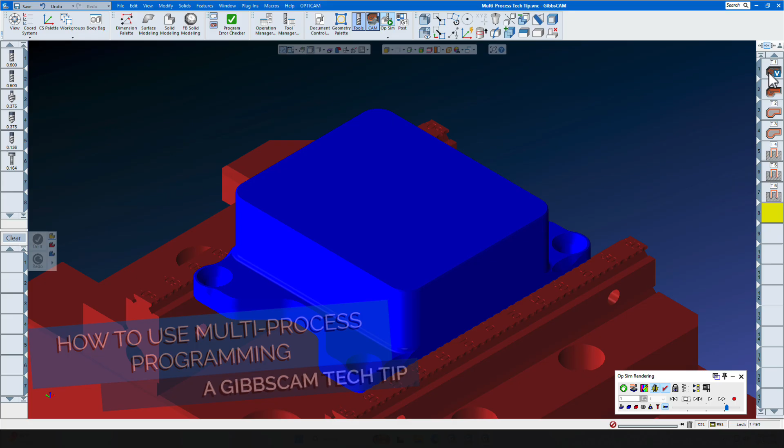In this GibbsCAM Tech Tip, we will show you how to use multi-process programming to instantly apply multiple processes to shared part geometry. It can be a time saver by only having to select the part geometry once for multiple processes. Save the processes to your library for quick recall to other part files with only minimal changes required. Let's show you how this works step by step.

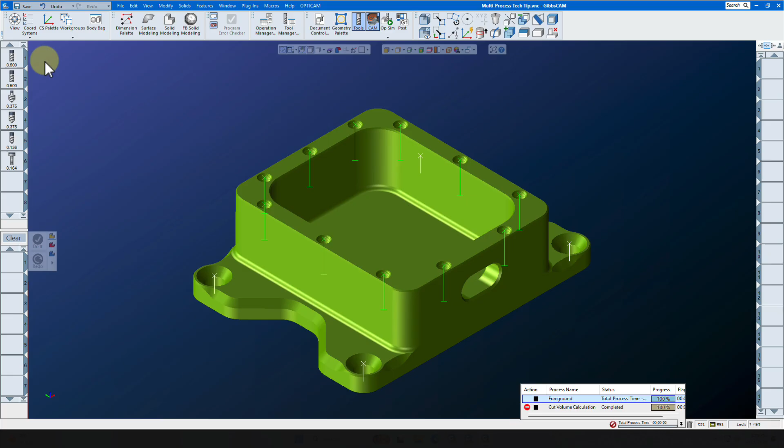We will start with an empty operation list and an empty process list, but we will stick with the tools since that's a very simple matter. Let's have a look at the tools we're going to be using: a 1/2 inch rougher, a 1/2 inch finisher, a chamfer mill for deburring. Next, we will use a spot drill, a number 29 drill, and an 832 spiral flute tap for these blind holes.

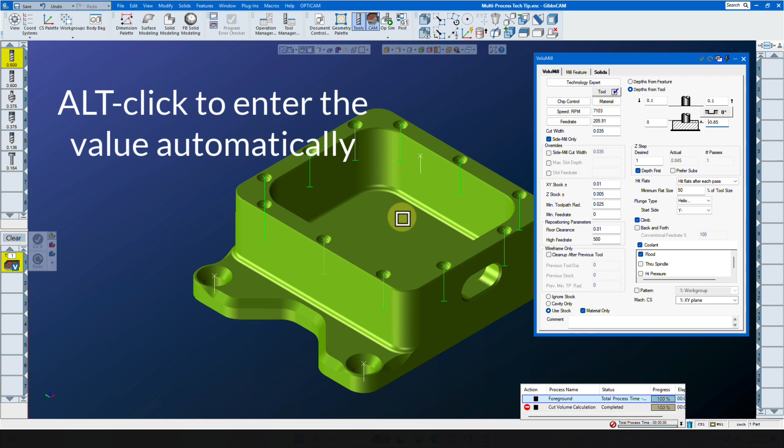Let's start by developing a VoluMill process for the pocket. Clicking on VoluMill, let's check our parameters, and the bottom of our pocket needs to be called out here at -850. Notice that is a double click, alt click on the bottom of the pocket. We're going to leave 10 thousandths of XY stock, 5 thousandths of Z stock.

Next, let's bring the semi-finish cutter down and finish only the floors with a roughing process set to offset with cleanup. Same depth. Pocket stock will be 10 thousandths. Floor stock or Z stock will be 0.

Next, a 1/2 inch cutter with a contour to finish the inner wall. We have our RPM and our feed rate. Our depth is set, our lead in, lead out. Our stock will be 0. Cutter compensation is on. Lastly, for this operation set, we will select the chamfer mill and a contour.

We will set the contour depth to -0.1 and the chamfer width to -0.025. That's the width of the chamfer here on the top of the part. All 4 processes are now ready.

We only need to supply some geometry. We'll use the profiler, select the geometry, and click Do It. Notice that we have the process manager open down here in the corner because it takes a few extra seconds to process all of these at one time.

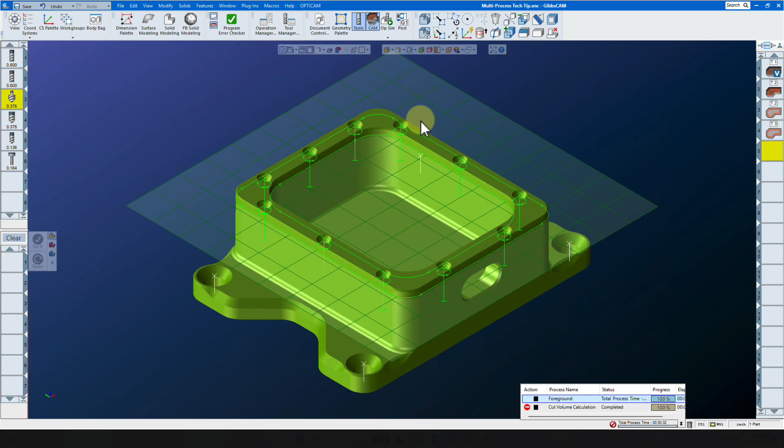We've used the hole manager to single out the holes. Let's start with the spot drill and go directly to a holes process. Our feed and speed set for this material, 4140, is there in the database.

We will be using the hole manager for automated drilling. Our R level, our top of hole, this will be a chamfer, and yes, we want to adjust for the tool tip. The next process that we will build is the number 29 drill, still with a holes process.

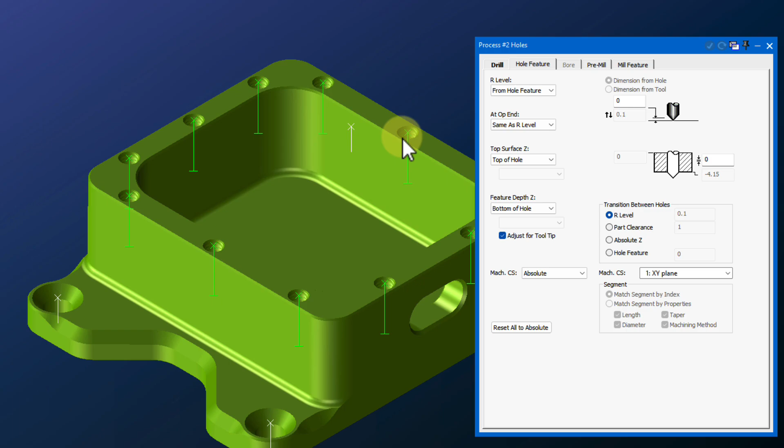Then peck chip break. Our hole feature needs one change: we will change this to bottom of hole for feature depth Z. When you select this, it automatically senses where the bottom of the hole is. Even if all of these holes were at different levels, this one operation will drill them all at their corresponding depths.

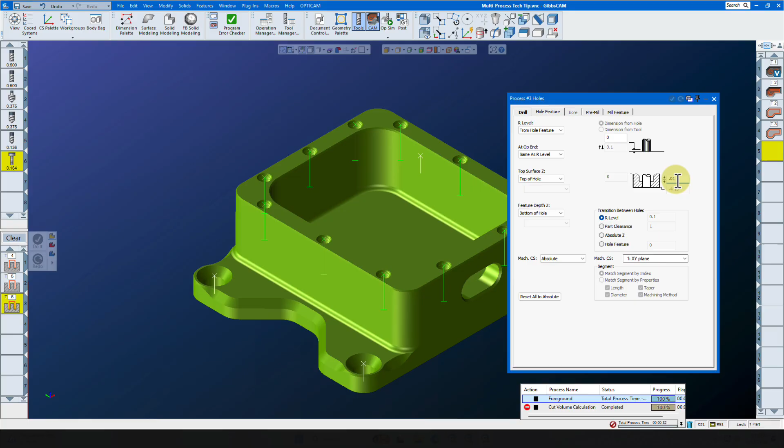Lastly, we have an 832 tap, which we will set to rigid tap and an RPM of 400. Our hole manager will make one change there: bottom of hole plus 100. So we want to stay 100 off the bottom of the hole.

There are 9 holes in this part. If there were 90 or 900, there would be no additional clicks. We simply click one hole feature, right click, select the whole group, and click Do It.

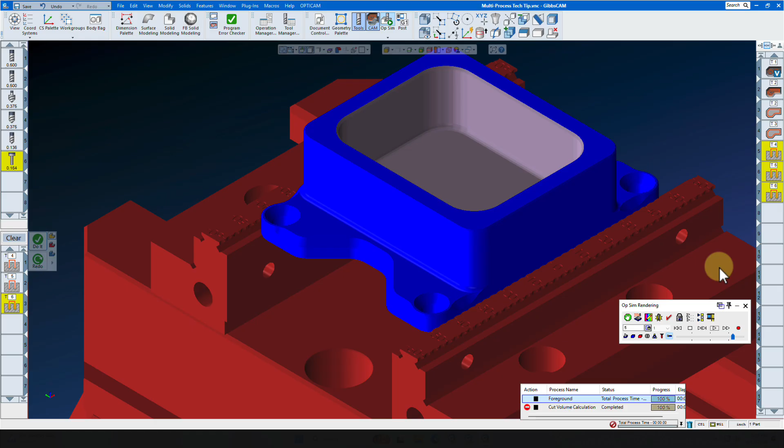We now again have all of the operations done, and if we watch them run in the OpSim, again you will see that they are all linked together, and when you double click one set, that entire set gets reloaded onto the process list, where you can make modifications and click redo even while the simulation is running.

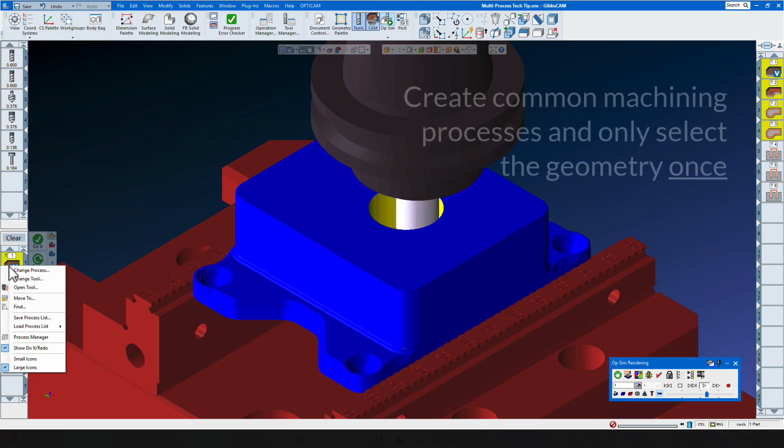Let's review some fine points of multi-process programming in GibbsCAM. Multi-process programming allows you to define multiple tiles in the process list and apply them to the same geometry. You can create commonly used processes and only select the machining geometry once. These combined processes may be saved, recalled quickly, and applied to a new feature on the same part or in another GibbsCAM session altogether. Multi-process tiles are as easy to set up as single process tiles and require no extra steps.

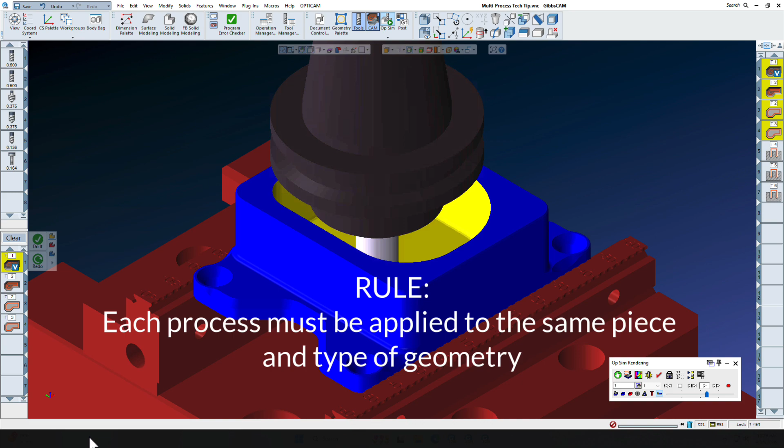Rule 1 is that each process must be applied to the same piece and type of geometry. Example: drilling and pocket roughing may not be created together. Multiple features may be programmed at the same time as long as they are applied to the same piece and type of geometry.

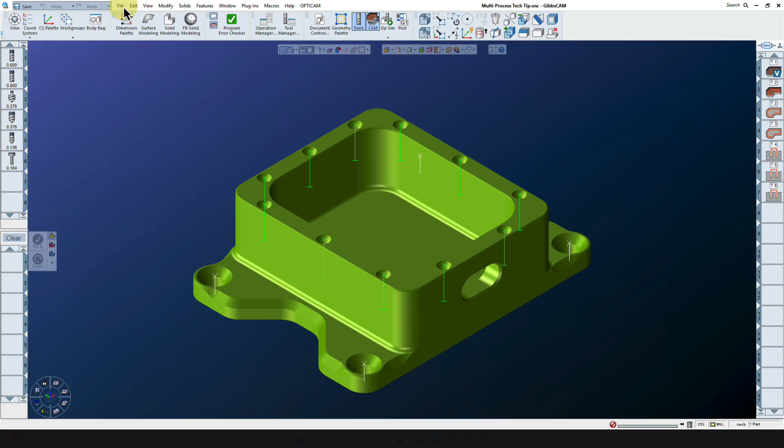Now that this multi-process part is complete, let's move on to a totally different part file with 2 different pocket features in it. The depth of the pocket is a little bit different, so we will update those when we bring in the processes. Notice that the tool list is empty, the process list is empty, and the operation list is empty. We saved those earlier, and now we can simply reload them with a click.

Update the pocket floors with a double click and an alt click on the pocket floor. Same for this one, for the floor finish, and the same for the contour wall finish. The deburr pass does not need to be updated because its depths and widths are correct.

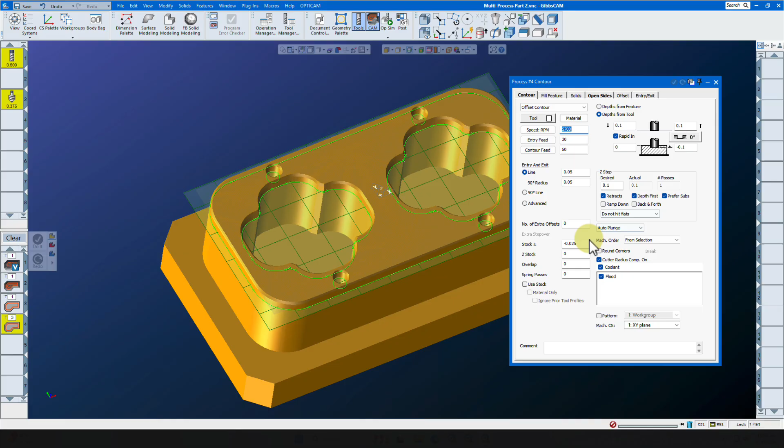Using our control key, we will select both pieces of pocket geometry and hit the Do It button only once and create 7 brand new operations on a completely different part.

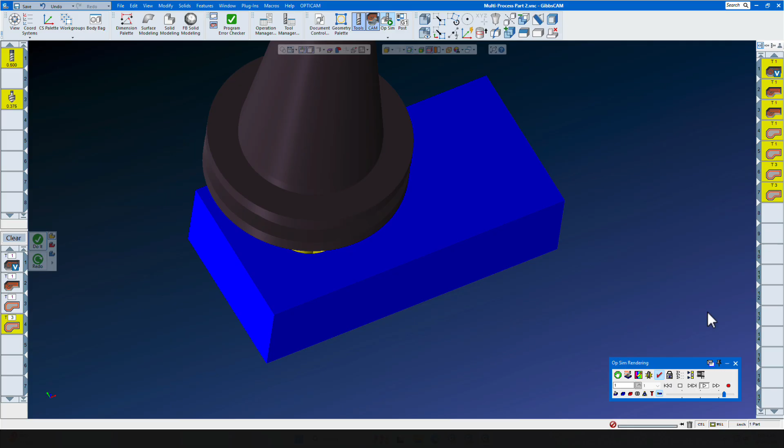Use multi-process programming to streamline and shorten your programming time. If you have any further questions, please contact your local GibbsCAM reseller.